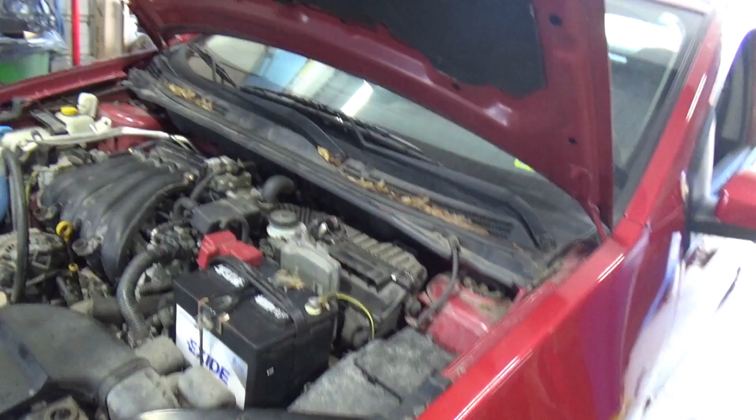We're at a shop about an hour and a half away from State College. Got called in on this 2011 Nissan Sentra. 33,000 miles, old lady drives it, and the story was she was driving it and it just quit on her. Took it to another shop, and here we go.

Don here, he'll correct me if I leave out any parts from the parts cannon. But we had spark plugs, a fuel pump, all the coils, and then they put the original ones back on. Catalytic converter, maybe. You saw signs that it was taken off? There was signs it was taken off. Okay, but you're not sure if it's new or not? Okay. And then that shop said, hey, start it up, drove it around the block, and then it died again. Never ran, got towed here.

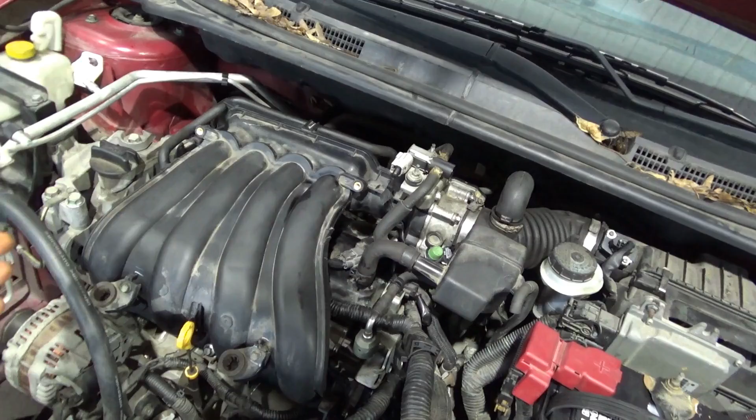And Don, he did his own diagnostics, checked fuel pressure, checked the injector pulse, put fresh plugs in it. He replaced the upstream air-fuel ratio sensor because there was some rodent damage on it, so that's brand new. Did a back pressure test on the cat. He said there's zero back pressure when it's running. He said it runs super rich. Like minus 25% fuel trims, it bogs out. Not happy, the plugs get soaked.

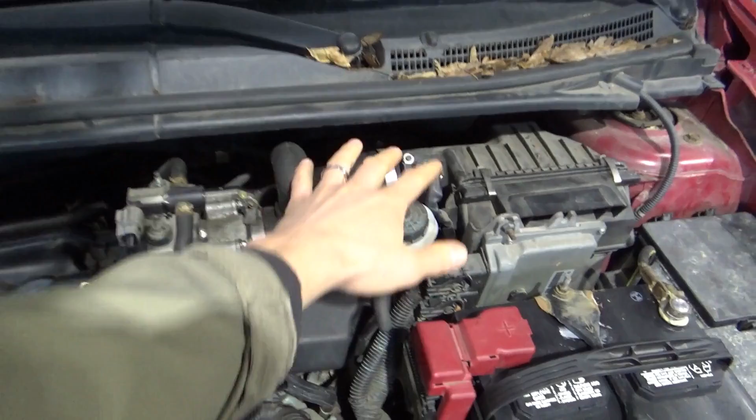And then he said he popped off this hose right here. So this is the air intake system. There's the mass airflow sensor. This is the fresh air vent for the PCV system. And then the PCV valve is right here. So you have vacuum going back to the intake manifold. He took this hose off and he said the fuel trims stabilized, the car ran pretty decent. Okay, so that's where we are. What would be your approach to this? No code set, just I think a P0300, random misfire code, not very helpful.

So cold start, it's got fresh plugs in it. Let's pull up some live data, see what it does on a cold start. If the fuel trims go boom, like minus 25, and it starts running rough, we'll pop this hose off just to keep it running and see what the mass airflow does and what the injector pulse width does. So there's something really wrong in this fuel map, fuel trim situation. It's running super rich apparently. We have to figure out why.

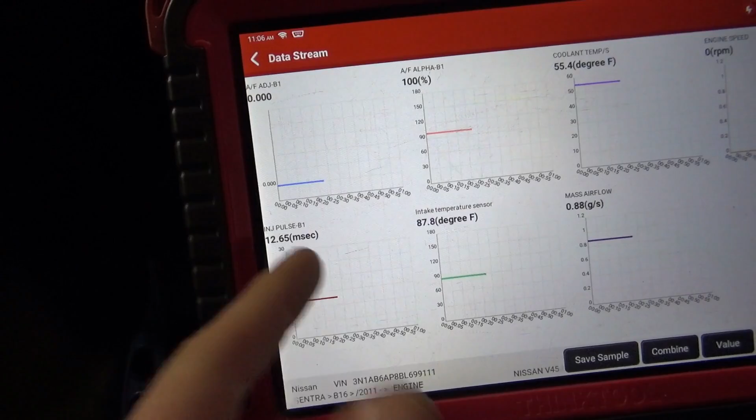Okay, so we're starting out here just by looking at the upstream air-fuel ratio sensor. So that won't come online until it heats up, but that should happen pretty quickly. Coolant temp is at 55, engine speed's at 0. Injector pulse width is 15 or 12.6 starting out for a cold start. Mass airflow, that's basically 0. Car's not running. Intake air temp is close to 90 degrees Fahrenheit.

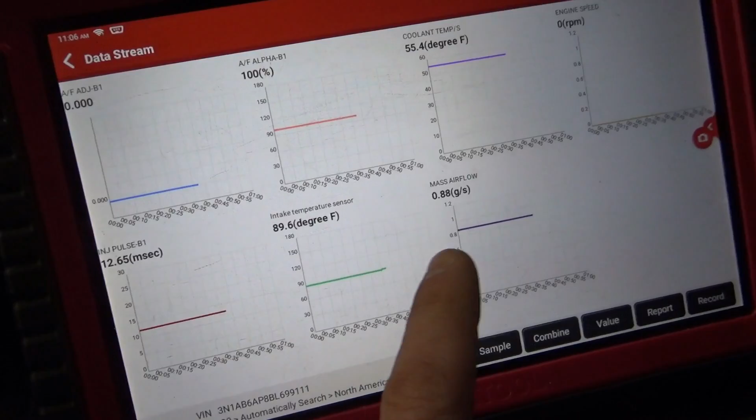So my question is, this is integrated into the mass airflow sensor. So right now with the key on, that hot wire might be heating up, and that's actually increasing the temperature of the intake temperature sensor. So that could throw you for a loop because you expect these two temperatures to be very close to each other on a cold start, but with the key on, this has been rising slowly. Let's fire it up, see what happens.

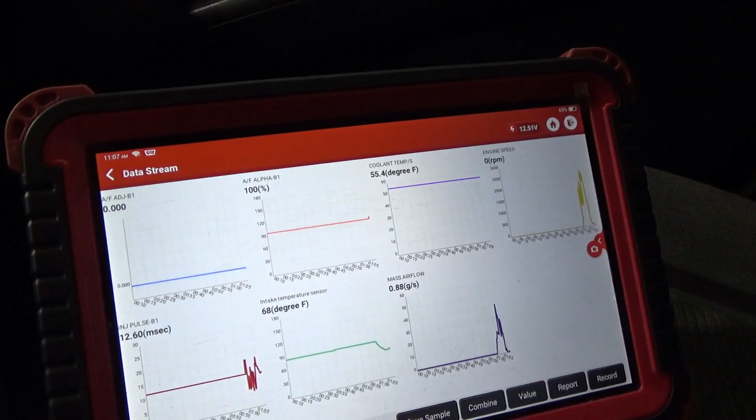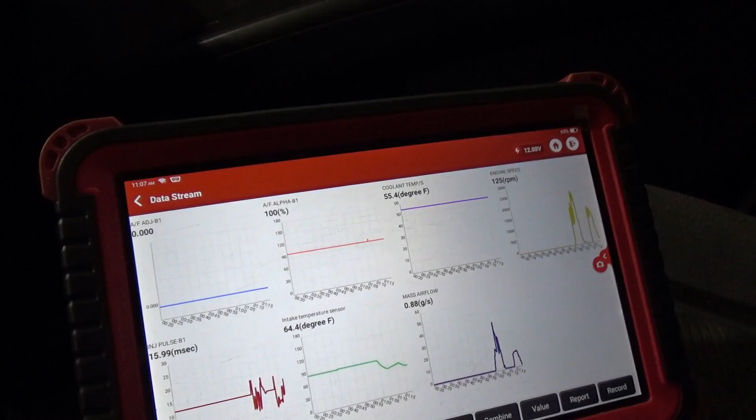So I gotta keep gassing it, and it's stalled out. Okay, let me try it one more time. 13 grams per second on the mass airflow. That's insanity. That's why it's running rich. And there's smoke everywhere. So right there, I started up and it was like idle and then stalled. And let's screenshot that. It went up to 13 grams per second.

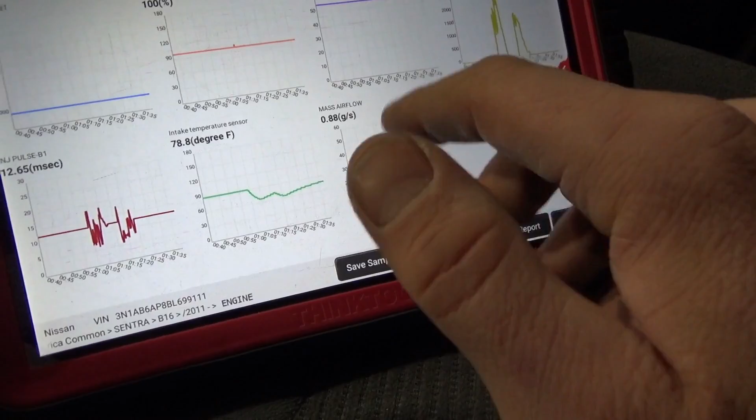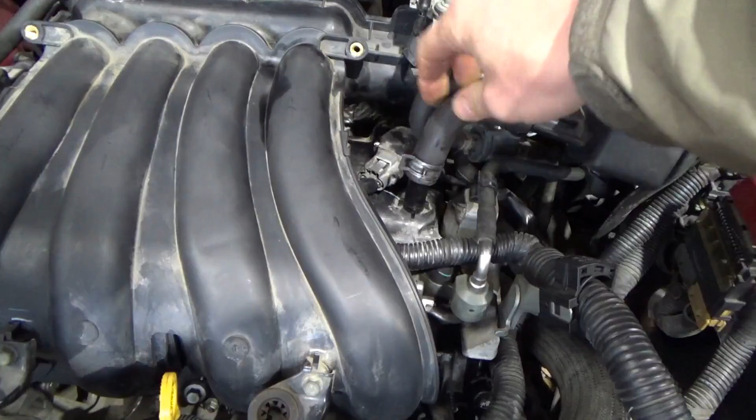And then Don said, well, can we unplug the mass airflow? He tried it. But Nissans are so picky that they will not run without the mass airflow sensor. So that kind of makes sense that pulling that pipe off the valve cover reduces the reading of the mass airflow sensor and the car can stay running. So let's try that. Let's just pop that hose off and see what happens. So the hose is off, so it's going to suck in air through here instead of through the mass airflow. Let's see how it runs and what it reads.

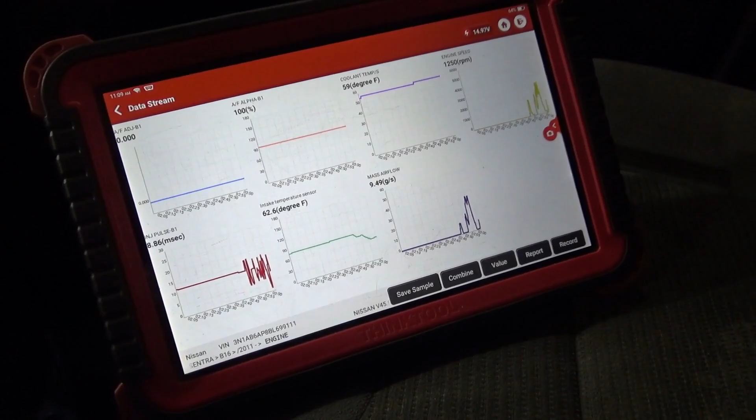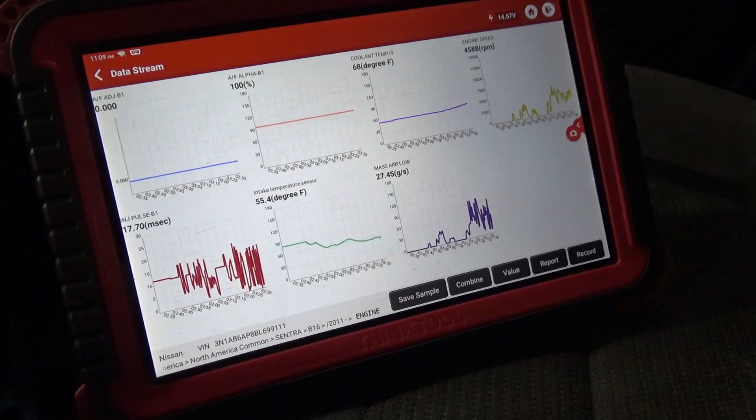Okay, start up again. Gonna give it some gas so it stays running. Oh, come on. There's so much smoke coming out of this thing, it's insane. So I have to floor it to keep it running. Otherwise it dies.

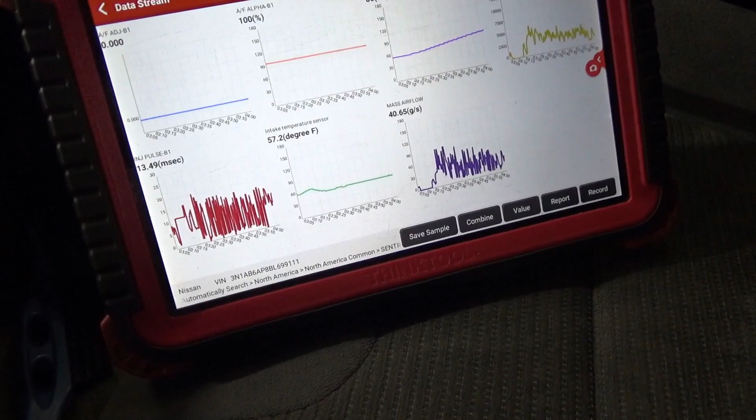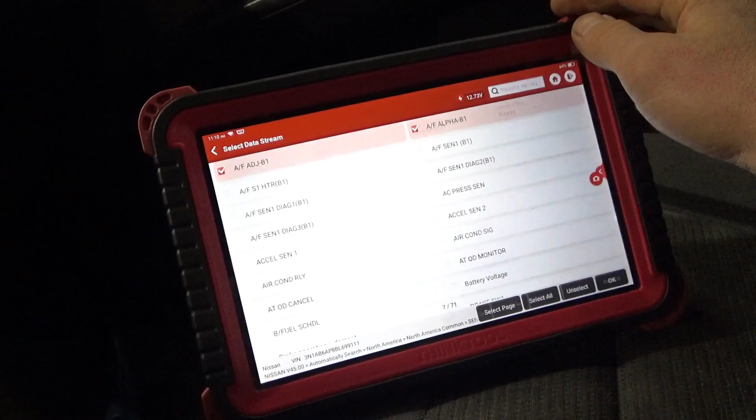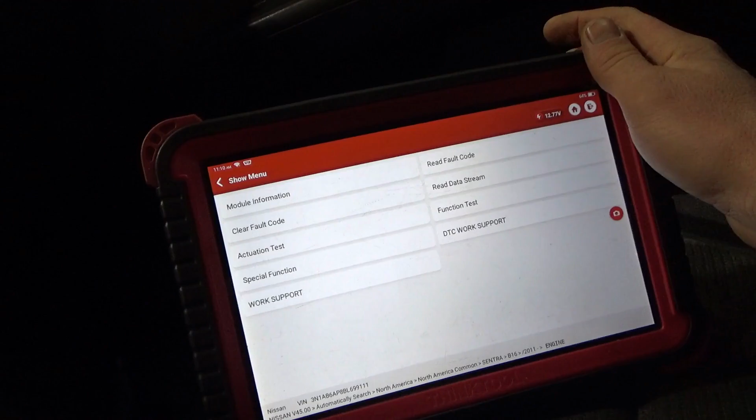That's insane. Okay. Let's see if it set any codes. It does not want to idle at all. Read fault code. No DTCs detected. Unbelievable. Well, I think we'll back it out so we don't fill the garage with smoke here and then go from there. But this is crazy stuff.

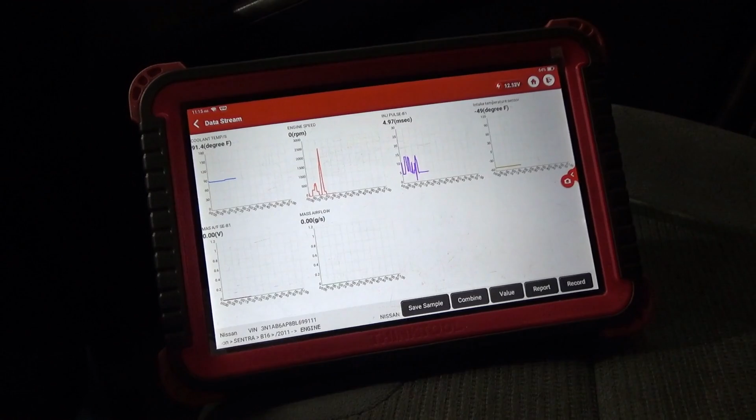Alright, so we have the mass airflow sensor unplugged right now. Our intake air reads minus 49, 0 grams per second. Let's see what happens when you start it up. I'm going to floor it. One more time. So it really doesn't like running with the mass airflow unplugged, it looks like. But it doesn't like running with it plugged in either. Can we trust the data and what is going on?

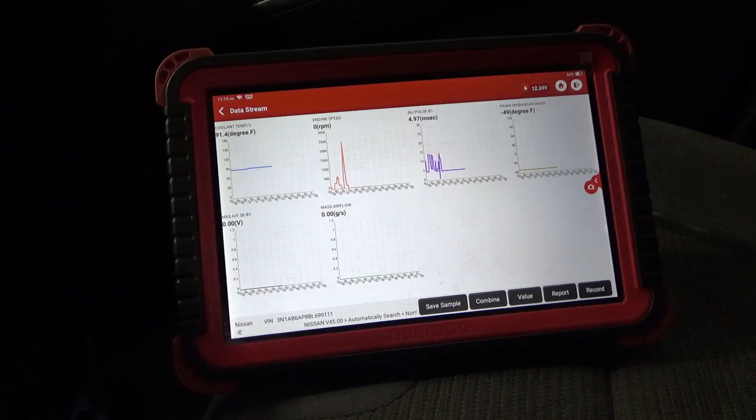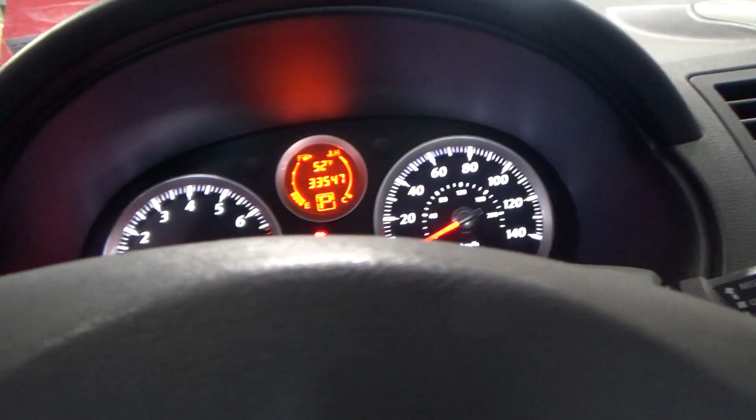This is a good one. Alright, so mass airflow sensor plugged back in. Still a start stall. I'm trying to floor it, trying to keep it alive. Let's see, does the throttle body work fine? Can you hear it moving?

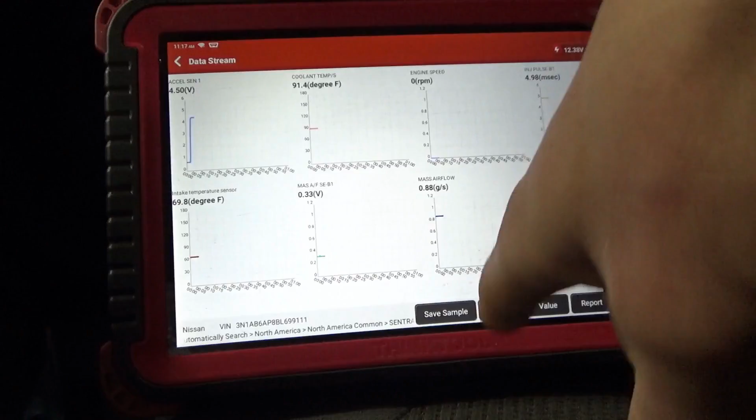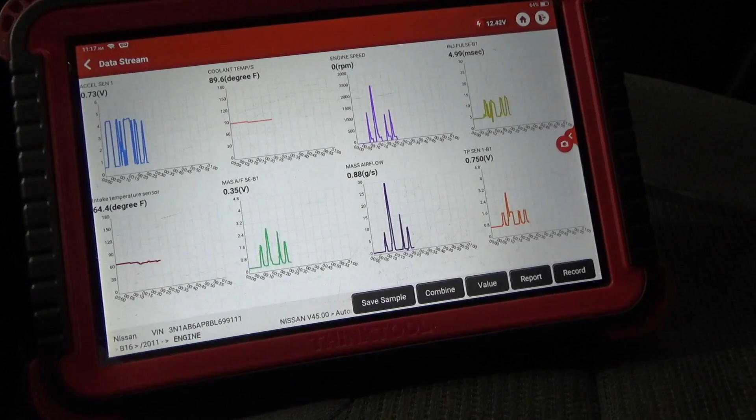I guess we can put that in the data stream. I'm going to put APP sensor, accelerator sensor 1, and then throttle position sensor 1. We'll graph that. So accelerator sensor definitely works. Let's look at the throttle. Man, it's really not happy. That works, that works. It should run. I don't see any reason why it's not at least coughing and trying to run.

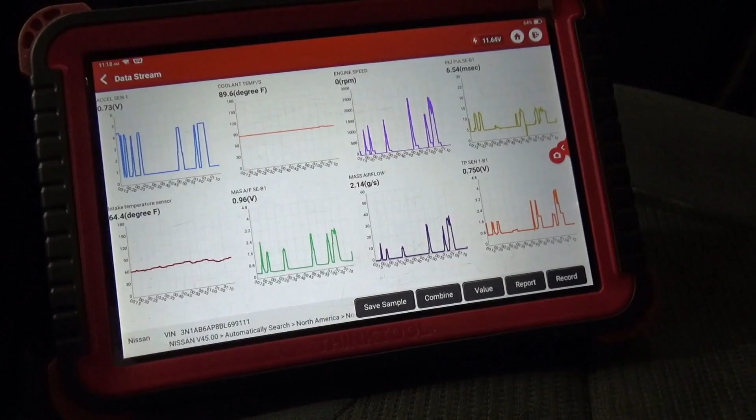Just revs up and falls on its face. I'm gonna put this hose back on, maybe. Yeah, okay. That was floored. So I kind of would play with it, right, up and down. Just play with it up and down. I don't know. All right, you get this thing running, Don. This is crazy.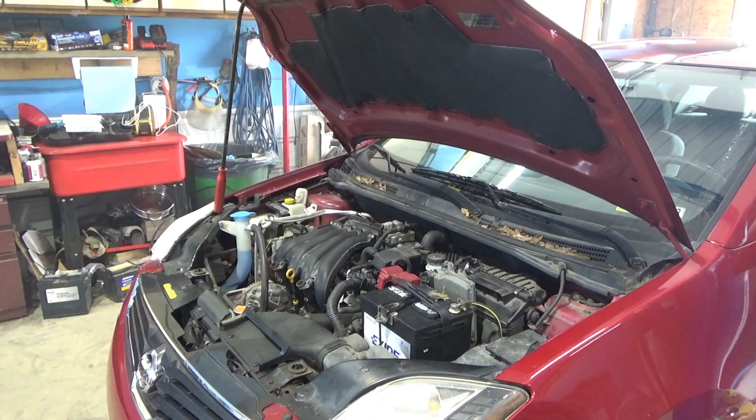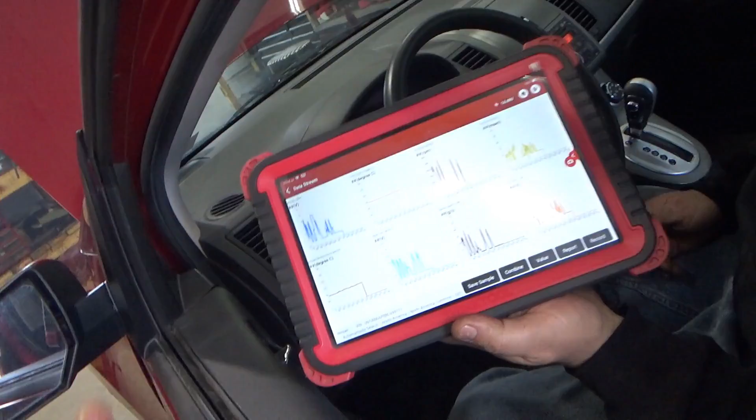So that's worse than what it was before. And you said usually you keep it alive, right? Yeah, and I did replace the... I put the Denso air fuel ratio. Yep, yep. That's how you do it. You got, like, for a minute, you gotta. So now you can pull the hose off? Check the engine light now. All right, hose is off. Okay. Let's try one more time, see what it does with the hose off.

Something's up. What? Like, it's weird. You can hear it through the intake, like it's... Like maybe the timing's out? It doesn't sound like it, but why would it be kind of like backfiring through the intake? Unless it's pouring that much fuel.

So when you got it, was the oil nice and clean? Well, it's the same oil. I didn't change it. I wanted you to smell it. I don't smell it that bad. Okay, and the level's okay? The level's a little over full. A little over full. All right, well, let it sit for a little bit. Let me take some notes.

All right, here's where we are. Popped out the only accessible spark plug, number 4. Obviously, it's black and wet. This thing's dumping gas. What I want to do is just do a base engine mechanical test with a pressure transducer and see where the spark timing is in relation to top dead center. So just 2 channels. Channel 1's our sync on the ignition coil control wire. I'm not sure which wire it is. We can always move it. And channel 2, 135 PSI transducer.

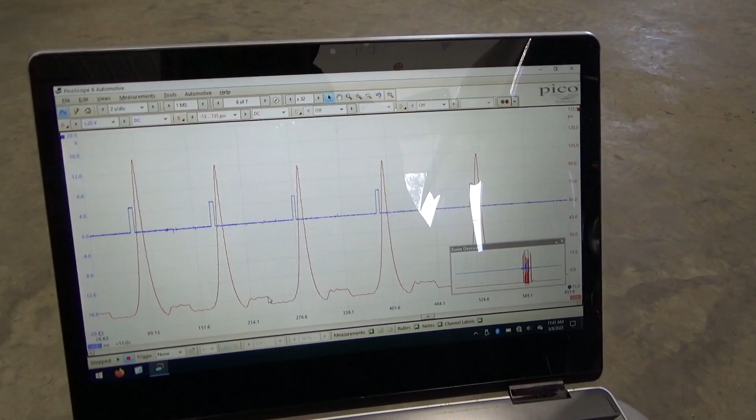Let's just see what happens when we start it up. And then, yeah, go from there. So I'm just going to crank it without giving it any throttle. Okay, something useful. Let's move it back, zoom in. There's our little pulse, close to TDC. We're going up to 105 PSI, not terrible. And the exhaust plateau looks right around 0 PSI, that's good. There's our intake. Yep, that's at 0. And then we're going down to -7. About -5 PSI.

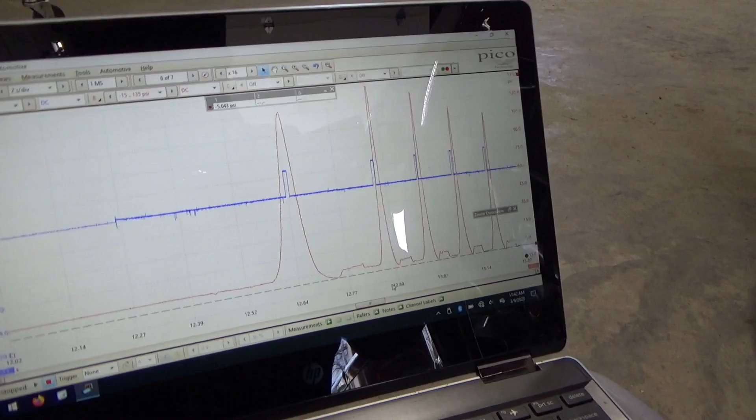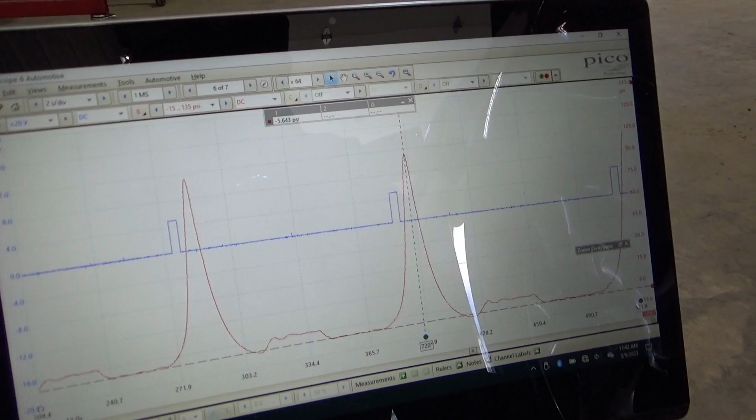I don't see anything drastically wrong here. And it just stalls out. Put in our rulers. So that's 720. 180, 360, 540, nice compression. What the heck's going on?

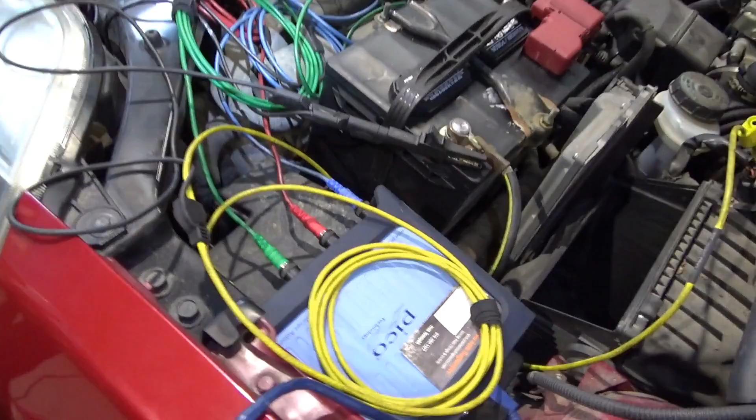Okay, we got all the channels going now. That means you know the car is getting interesting. So channel 1 and 2 are still on the spark and in-cylinder. Channel 3 is on injector number 4 control, I want to see the pulse width of the injector, and channel 4, the yellow, is on the mass airflow sensor signal, purple wire. So got all 4 channels rolling.

I'm actually going to hop in and try to rev it up and see if it starts up or not. Nope. Alright, well, we got something. I bet the spark plugs are getting so fouled out. It's not happy. Okay, back up.

Spark timing's on the money. Mass airflow is at 1.4 volts. Okay. What's our injector pulse width? From here to here. About 13 milliseconds. I mean, that's a lot of fuel, and we know it's overfueling.

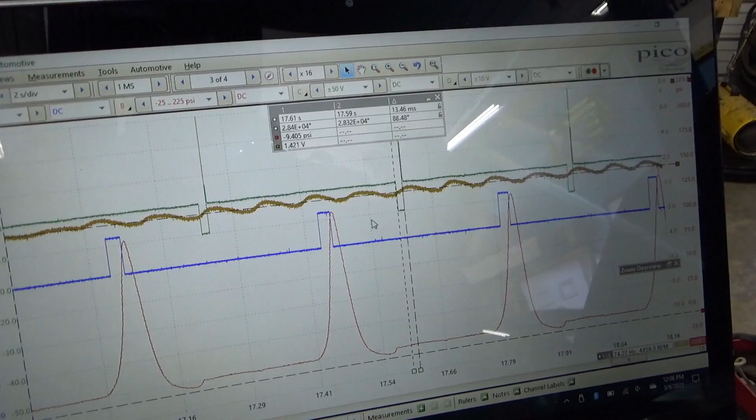But the fact that spark timing is really close to TDC, at and a little before, that tells me that timing looks okay. And when it ran, we could actually see, it didn't run here, it was just cranked, we could see intake and exhaust valves opening okay.

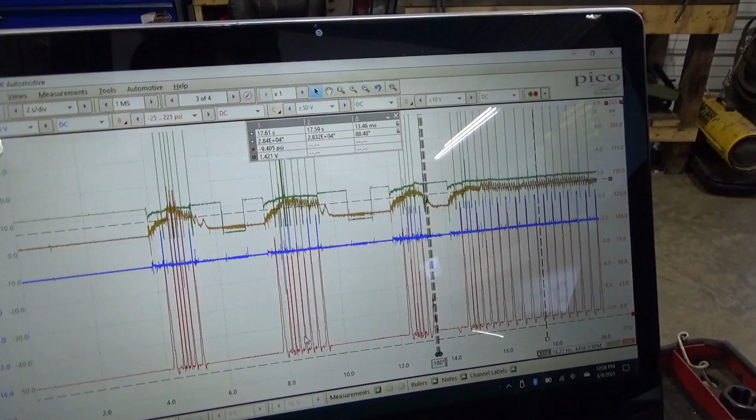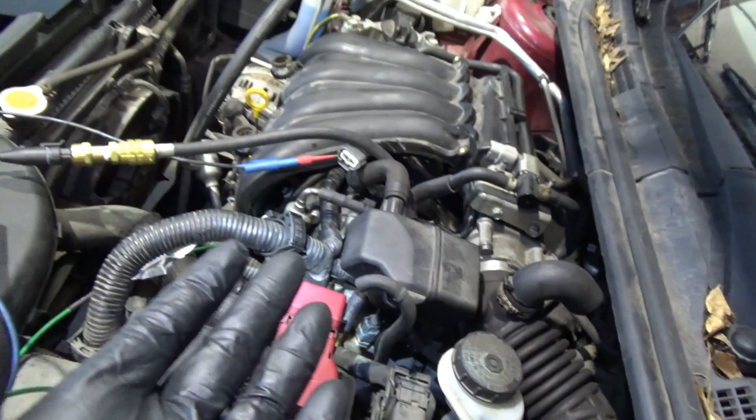We do have a new mass airflow sensor to try out. Hitachi. Now again, don't want to throw any parts at it, but right now that's the only input for the injector pulse width, and we know it's getting too much fuel. So it's either wrong gasoline or mass airflow sensor is reading too high on startup.

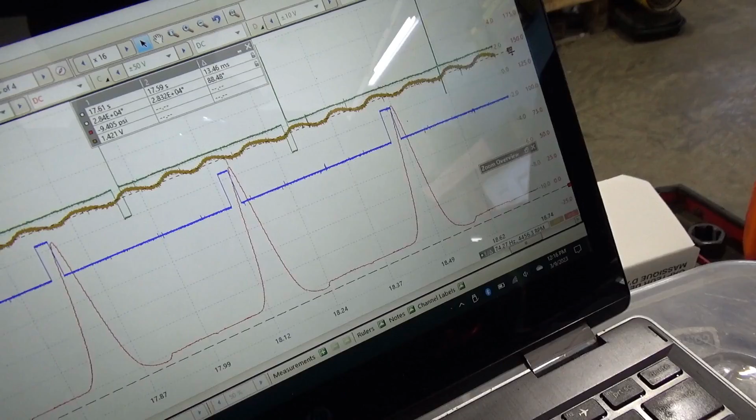Alright, we got a brand new Hitachi mass airflow sensor installed. Spark plug I cleaned off with a propane torch. That's reinstalled. Let's roll the scope. I guess I can save that capture and then we'll see what happens with the new mass airflow sensor. So the number to remember here is right around 1.4 volts. Alright, let's see what happens here. Oh.

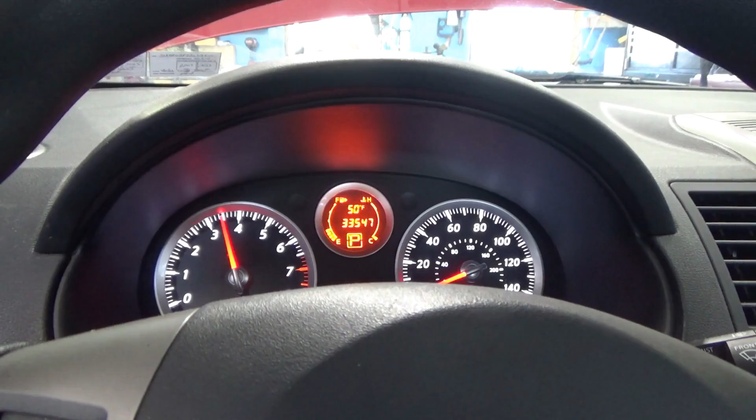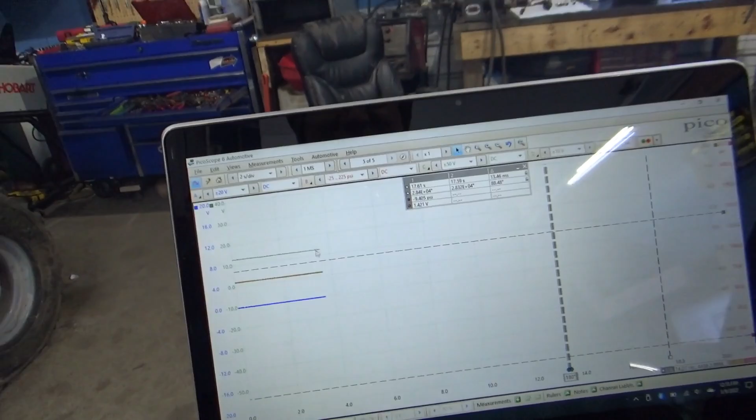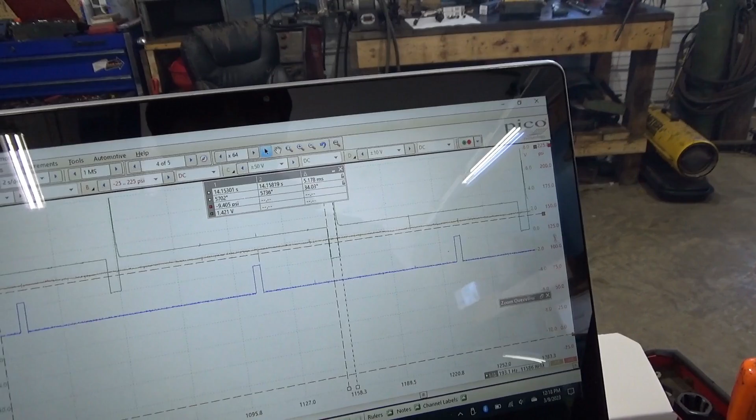Let's see what the injector pulse width was when it was idling. Five milliseconds, and our mass airflow was at 1.8 volts. Before it was at 2.4 cranking. Yeah, okay. Yeah, that's a pretty big difference.

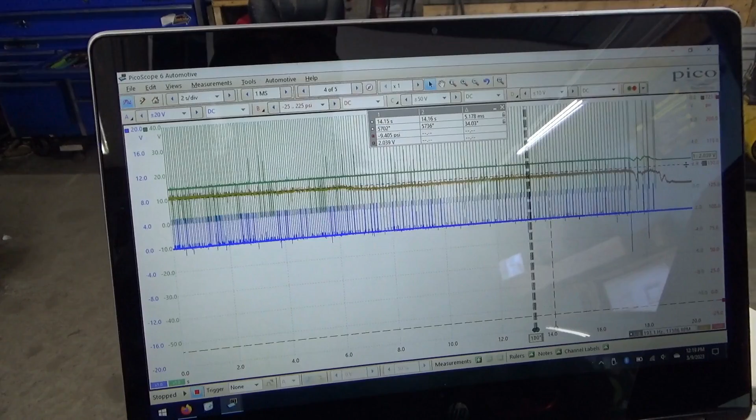Let's look at scan data, see if anything changed with the mass airflow actual calculated value. Yeah, I don't really know what else to say. So even when we're revving it, we're at 2 volts, not even at 2.4. Before, when we were cranking, it was at, I think it was 2.4. Yeah, it was high. It was way high. So that's definitely a difference.

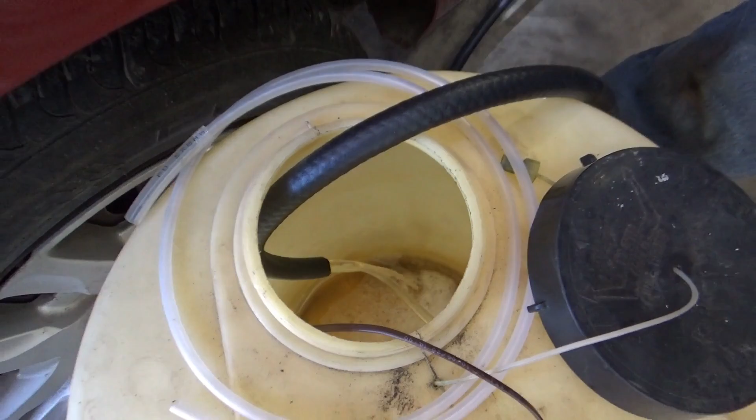So we're draining the gasoline out of this thing. I don't like it. I don't think that smells like it. So there should be more than 4 or 5 gallons in there. Well, so you think someone pissed in the tank? I don't know. You think it'd smell a little more fumey than that, right? Yeah, usually gasoline's like, whoo. Yeah, bang in your face. Yeah, I don't think it's volatile enough. Whatever they put in there. It's horrible. So we'll drain it, put in some fresh gas, and I don't see any other variables here really.

We want to do a flammability test here. So we got some in the bottle. It's still burning. It's still burning. It looks like there's some oil, right? A little bit. Yeah. Here we are videotaping this. Here comes the EPA.

All right, you have some known good gas. So yeah, pour a little drop over there. That smells like campfire. Okay, here we go. I don't think it's gonna burn quite as long as that one. This one's more volatile. This one's leaving like oily residue everywhere, doesn't it? That one's kind of burned right up clean. Exactly. Yeah, you wouldn't know that we spilled something here, but here you see all this, it's almost like oil. Did they put diesel fuel in this thing at some point?

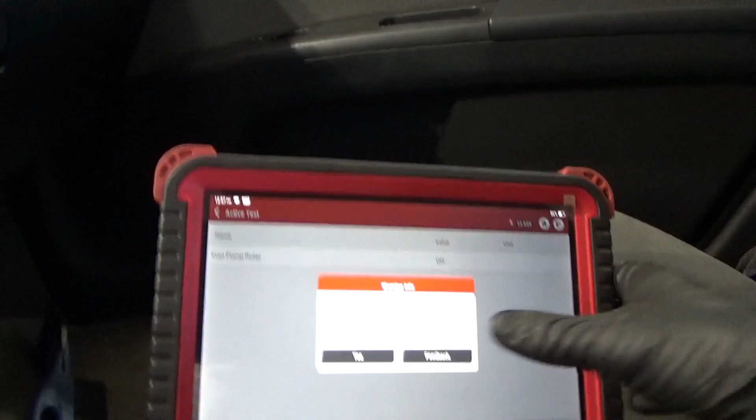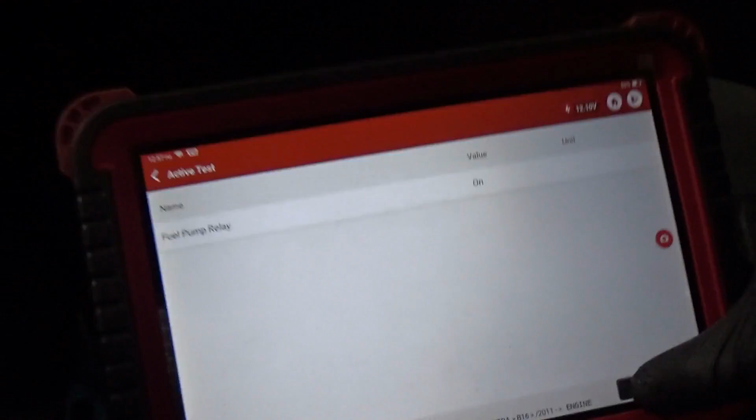We don't know. All right, we're putting some fresh, known good gasoline in the tank. Drained about 5 gallons of this mystery orange oily fuel. We'll plug it in, see if it runs. All right, here we go. I'm just gonna prime the pump. Oh, key on. Yes. Fuel pump relay. No data. On. No leaks back there. It's all plugged in, okay. All right, fire in the hole.

It'll take a little while to purge that line out. Oh yeah. Take a little while to purge the line out. It's probably, spark plugs are still not happy. Almost, almost. Come on, baby. One more time. And then we'll definitely need to do an oil change. We will, for sure. Yeah.

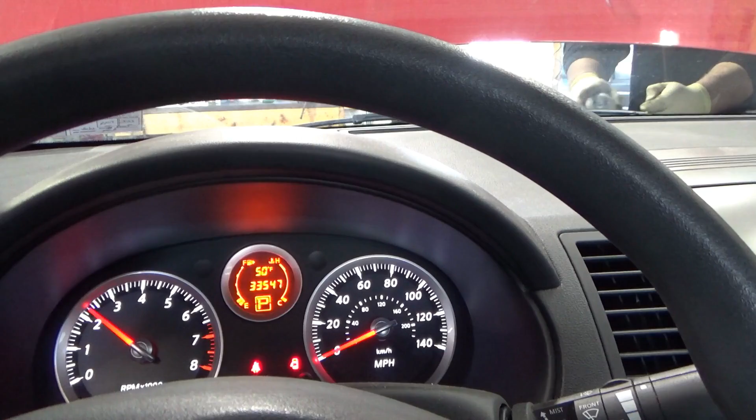What's supposed to get tired is some other stuff. You want to try out the starting fluid again? Yeah. All right, go for it. So once you stop spraying, just plug that hole with your finger. Okay. Right? Yep. Well, you can unplug the finger to keep it running. Let's try again. All right, try number 5.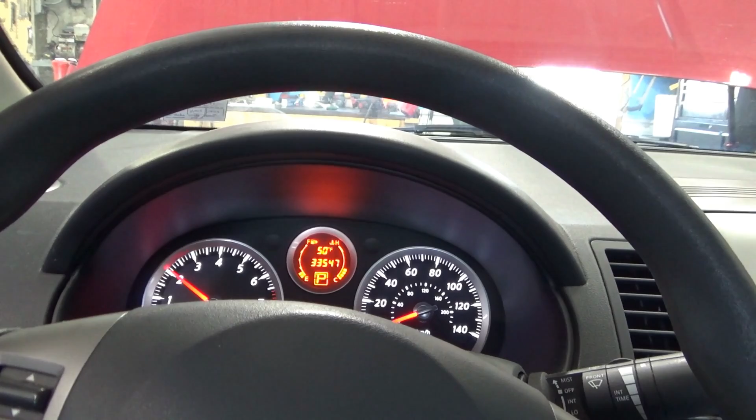Oh, it's getting better. Yeah, it's getting better. Yep, we can put it right back on. I think we're back in business. It's actually idling on its own with everything plugged in, right, Don? Yes, sir. Look, it's got some throttle response. Now it does. I think we gotta change the oil. Yeah, let's let it warm up a little bit. Change the oil out. Take it for a rip.

Yeah. So when it's overfull of oil and it has that weird flammable, semi-flammable stuff in it, it's gonna mess with the fuel trims. So we'll change the oil out, take it to the gas station, take it for a rip. We'll take a look at fuel trims right now. Just go into OBD2 mode.

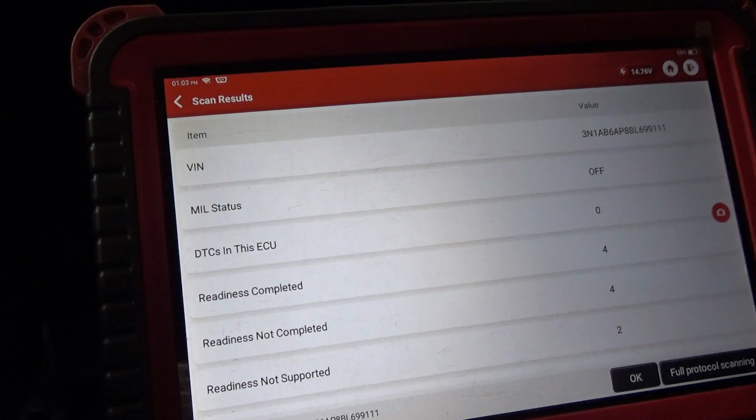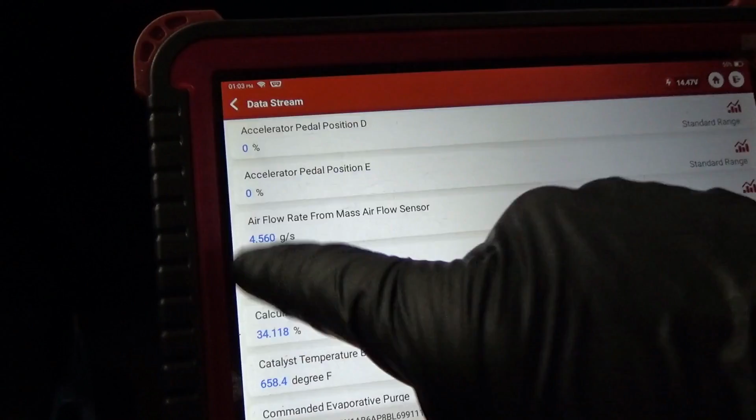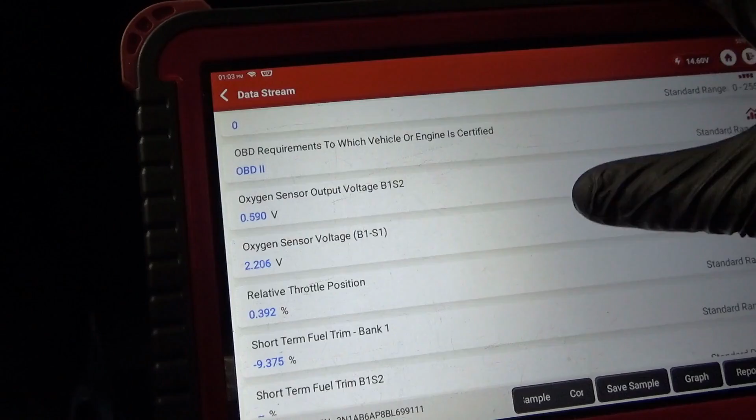Sounds better than it has. Yeah, the spark plugs are probably still a little funky, but let's read the live data. Take a look at these fuel trims. We'll select all. So 4.6 grams per second on the mass airflow, that's okay. Engine coolant temp's warmed up. Closed loop. Long term is 0 and short term about minus 10%. Okay, perfect, because we have fuel in the oil. That's working fine. Bank 1 sensor 2 is alive. That's good.

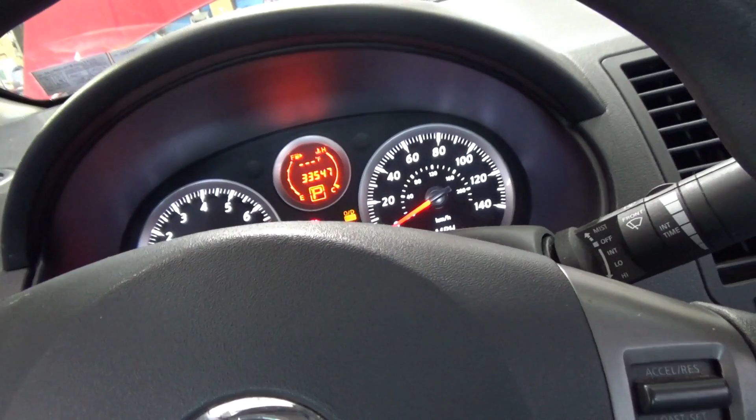So let's put in the original mass airflow sensor. Take this thing to the gas station. And if I shut it off, it should fire right back up like nobody's business. Like that.

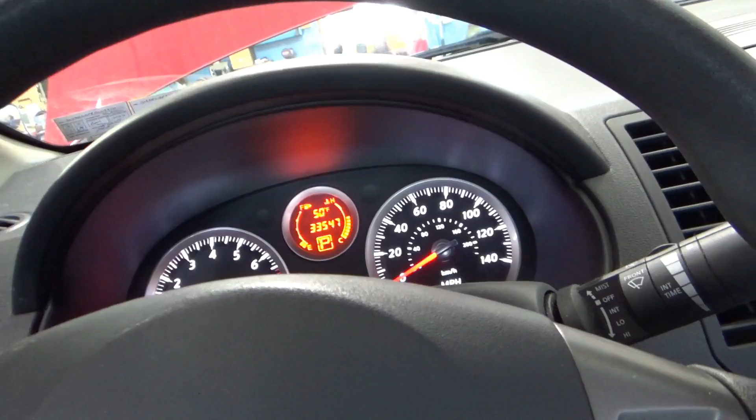I bet it's gonna be catalyst. Yeah, we don't know. Check engine light popped on, but it's driving. Decent power, no misfires or anything. Oh, it feels good. Feels good. It's got a little bit of a misfire. Yeah, the plugs still have to clean out a little bit. It's got a CVT though.

Not fun. We've been on this road before. Yeah, with a misfiring Chevy. Yeah. The parts cannon Chevy. Don here gets the best parts cannon case studies. I gotta tell you guys, I know when he calls, it's gonna be a good one.

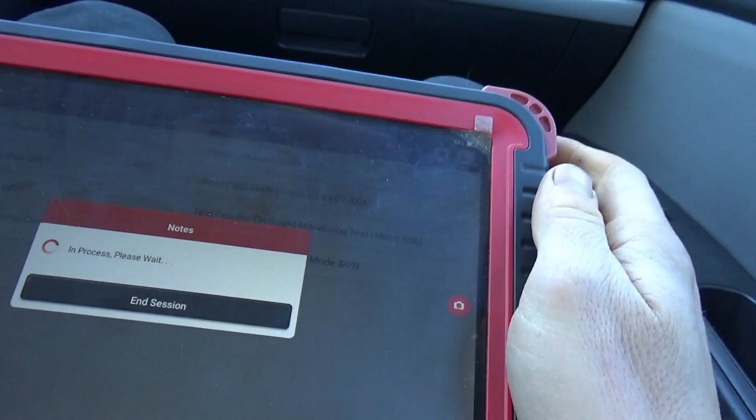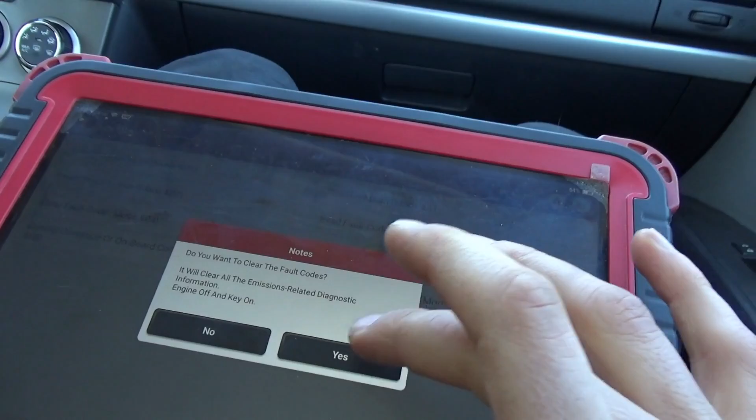Yeah, we just got some misfires and, is that what the code is? Throttle control performance. Or just delete them all. So we're running on fresh oil now. He drained about 6 quarts of liquid something and put in 4 quarts of 5W30 synthetic. DTCs have been cleared. No more check engine light? She's gone for now. She's gone for now, okay. No more money light.

So, I'd love to know the actual story of how this car ended up in this situation. I'm guessing that it would have to be the owner, the driver, who put the mystery fuel in it. Right? Because the guy who changed the fuel pump, he probably just changed the fuel pump. He didn't change the fuel. So, you know, maybe the lady left out a little detail, like, hey, it just happened after I filled up. That would have been a big clue.

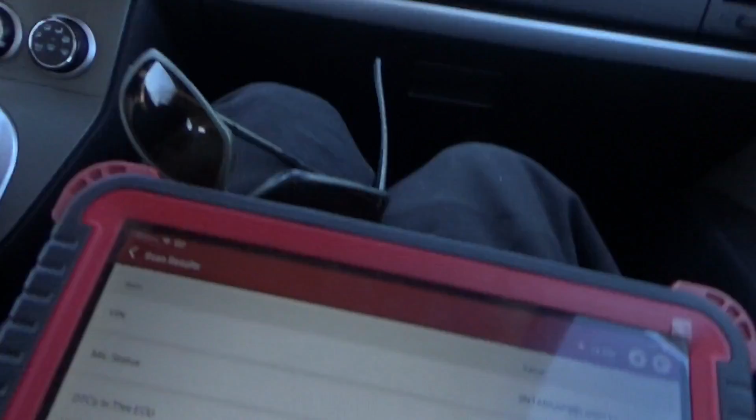Yeah, to be fair, she's in her late 70s. So, you know, we'll give her some slack. But hey, it's back on the road, running's definitely fixed. Oh yeah, she's cleaning up really well now. Yeah. Not bad for a 2 liter. So, just make sure our fuel trims are good.